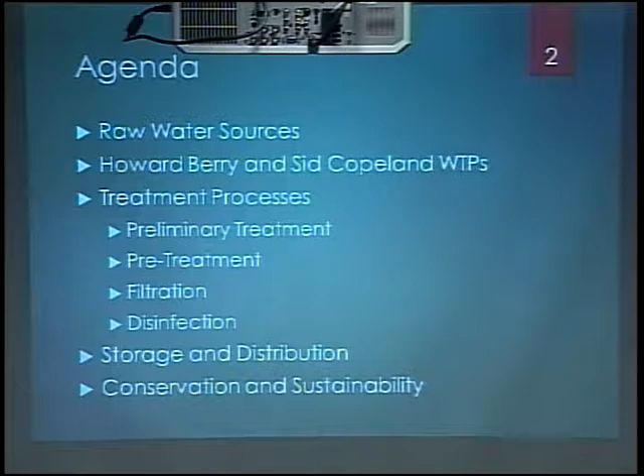So welcome, everybody. Again, my name is Corey Peterson, I'm with the city, I'm a water resource engineer. I've been with the city since 2015. So my first portion of the slide is just going to be going over water supply and where it all comes from. So here's kind of our agenda. We'll go through the treatment plant process and all of our different operations, and then we'll end it up with some conservation and sustainability tiebacks.

So as most of you know, Colorado is a semi-arid climate. What that means is we get less than 20 inches of rain per year. We do a little bit better than the state on average. The state gets about 14 inches of rain, Boulder County gets about 18, so we do a little bit better here in Louisville. But a lot of our water comes from snowpack. So this is the Continental Divide, it acts as our storage bucket and where most of our supply comes from.

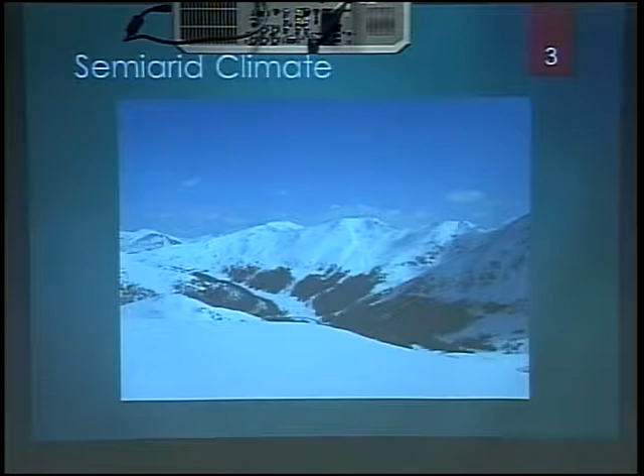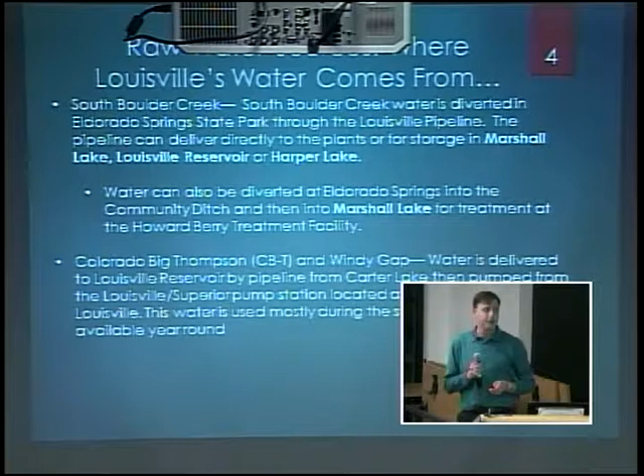So the city has 2 sources. The first source is South Boulder Creek, which is just straight south here. And then our other source is we get water from the Colorado Big Thompson, which is the Colorado River on the west slope.

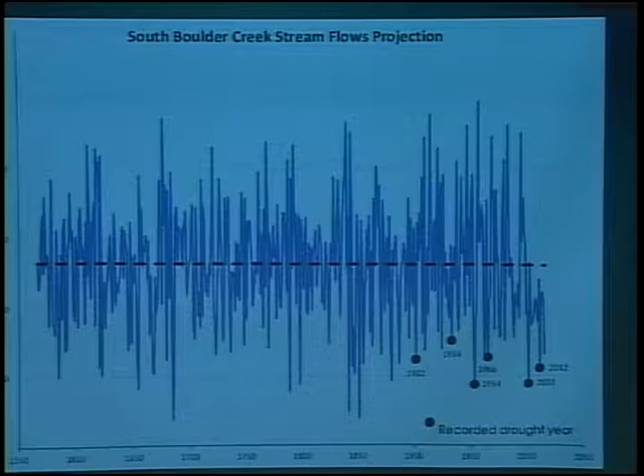Here is a stream flow projection recreated from tree rings. It goes all the way back to 1550, and you can see the variation of stream flows as it goes through. The other thing we noted, towards the bottom, are the recorded drought years we've had in the past.

You can see how significant it is, going from 100,000 acre feet down to 20,000 acre feet. An acre foot is something we use in the water community - it's an entire acre, 1 foot deep of water, a volume measurement. It's roughly 326,000 gallons, or enough supply for two average Louisville homes. That gives you an idea of what we're talking about as far as stream flow.

With this variation, storage is a very big component of our water supply, which is why we rely heavily on Marshall Lake and a couple local storage places - Louisville Reservoir and Harper. Louisville Reservoir is just outside of our North Water Treatment Plant, the Sid Copeland Treatment Plant, right over here on South Boulder Road. It holds about 210 acre feet of water. Harper holds about 715 acre feet, to give you a rough idea of what that looks like.

Since storage is such a key piece, I'll flip back here. This is the snowpack data from the NRCS for the entire South Platte Basin, which is what we're in. This dark purplish color is actually this year, 2018, so we're tracking right along where we are. We have this little dip with the last bit of warm weather, putting us at about 90% of average. This is something we look at regularly to determine where we are with water supply and where we're going in the future.

Just an interesting note - if everyone remembers last year's late snowstorm, we were actually tracking below average and were contemplating what we might have to do as far as restrictions, with various levels like voluntary restrictions. But we had those late snowstorms in May and June, which kicked us back into a very good year, and we were able to avoid any restrictions. Just a side note.

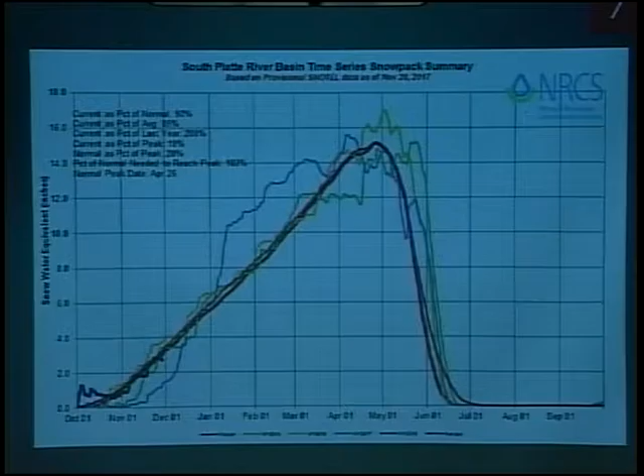The other place we get water from is the Colorado Big Thompson. This project was started in 1938, and it took until 1957 for most of it to get constructed. The Big Thompson project was done by Northern Water Conservancy District in conjunction with the Bureau of Reclamation - it was a federal project designed to take West Slope water and bring it over to the east.

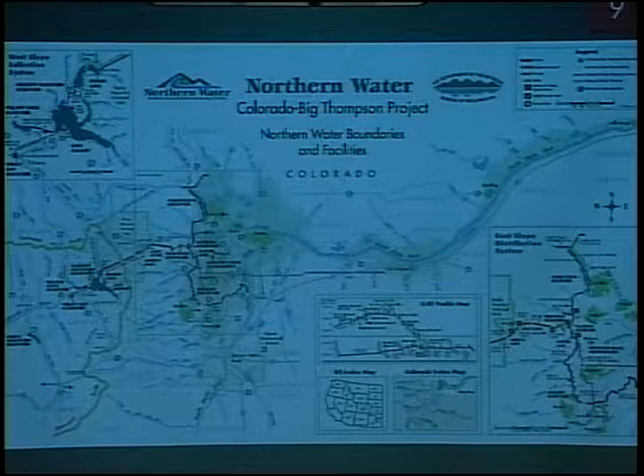Lake Granby was the next piece, started in the 1940s when construction began. There's a smaller Shadow Mountain Reservoir that gets pumped from Lake Granby into Shadow Mountain, which then drains into Grand Lake - the largest natural body in the state of Colorado, which is a cool fact. From outside of Grand Lake, it goes into the Adams Tunnel.

The Adams Tunnel was built in 1944, when they were able to hole through. What that means is they constructed from both west and east at the same time, and when they went through, the tunnel was off by only a sixteenth of an inch.

And this was in 1944. So it's very, very impressive that they were able to pull that off. The tunnel itself is a little over 9 feet tall, and it's 13 miles long.

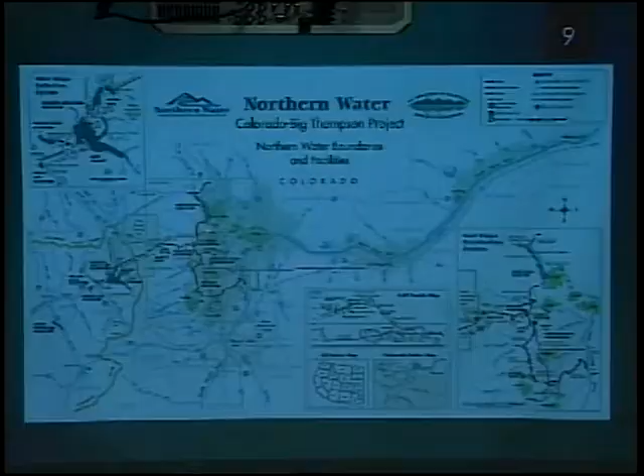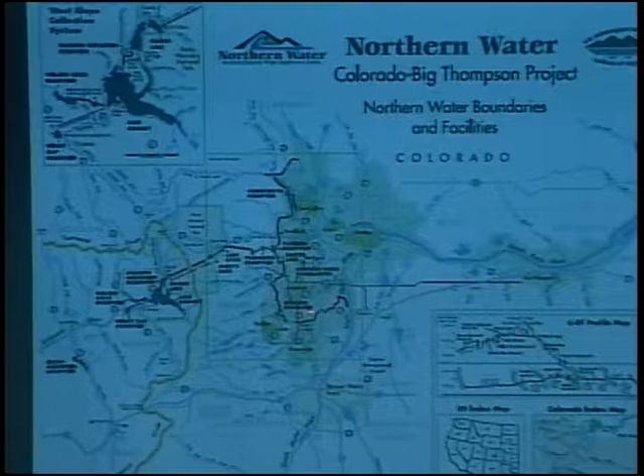Once it comes out the other side, it goes through a couple smaller lakes that they can use to generate power and offset their operating costs. And they can go into 3 storage reservoirs. It can go into Horsetooth, it can go into Carter, or it can come down here into Boulder Reservoir.

Louisville's water ends up in Carter Lake. That's where our water gets stored. And from there, it goes into what we're part of, which is the South Water Supply Pipeline. That's this little red line that comes right down here, and that's shared amongst most of our neighbors. So Lafayette, Erie, Superior, Broomfield, all of these surrounding communities use the same pipeline to get water from the CBT system out of Carter Lake to us.

We have about 2,000 units in CBT, and a unit is basically a half to 0.7 acre feet of water. So we get about 1,000 acre feet of water from the CBT system, and that makes up about 20%.

The exciting thing that we're in the process of now is a subset of the CBT system, which is Windy Gap, which is right here. The Windy Gap Reservoir started way back when. 1967 is when it was first started as a project. There were lots of lawsuits with this one on the West Slope, so it took all the way till 1985 before they actually constructed the reservoir. So it took about 15 years to get them all the way through and built.

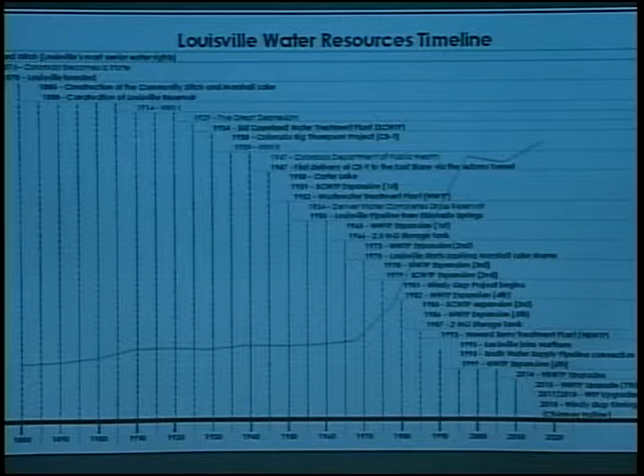Here's again when the CBT project started in 1938. The Department of Health was formed several years after that. So again, we're providing a source before a lot of these regulations and treatment processes were even in place.

Carter Lake was done in 1950. We started upgrading the North Plant in 1951, added more filtration to it, made it a little bigger. Our wastewater plant was also built in 1952. Terrell will go over some of this stuff in more detail, but that was kind of the driver for it.

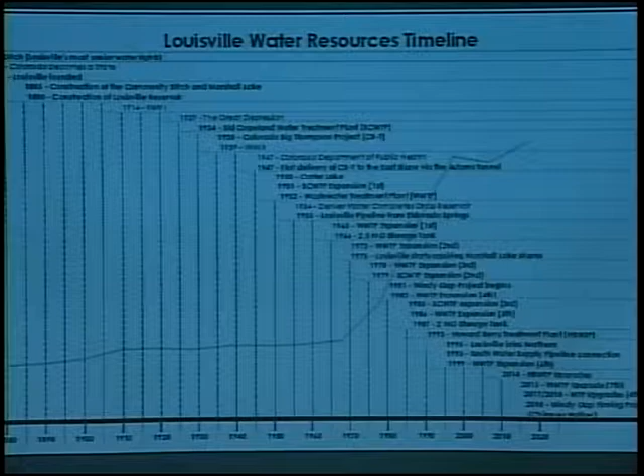We had our first expansion of the wastewater plant in 1965. Our first wastewater plant was just a settling pond with some aeration lagoons, and then we went to an extended activated sludge where we were actually actively pushing air into the system, which is all part of the treatment process.

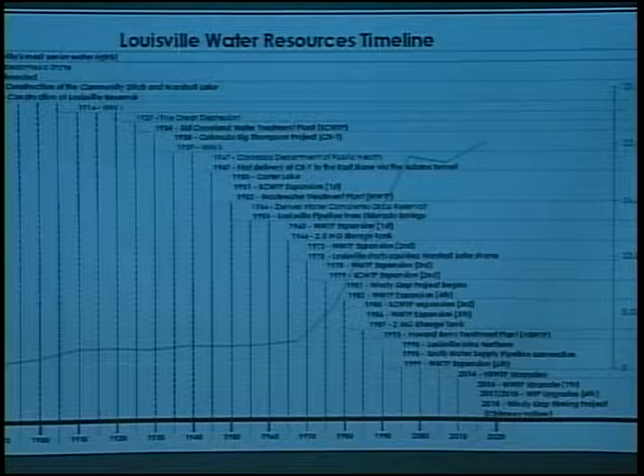We added a 2.5 million gallon storage tank for system pressure in 1966. That's out by our Howard Berry plant, on the south part of town, and that allows the pressure within the city to stay at the level that it can get to all your homes.

We expanded the wastewater plant a second time in 1973. We went to a larger lagoon system, went to 4 lagoons. We did that again in '78 where we went to a 6 lagoon system, and that was just more capacity to allow for this trend of more people coming into town.

We had another expansion of our water plant as well, and that was a new sedimentation basin as well as an automatic backwash, which was kind of state-of-the-art back then. Here's the Windy Gap project, which I mentioned before.

Probably the biggest one is right here in 1993 - we built a second treatment plant. This is our Howard Berry treatment plant, actually out on South Marshall Road, and it is a 5 MGD facility. That kind of really kept up with us as far as population control and those type of things, and being able to provide everything.

Let's see here, I'm trying to think. The more recent activity: in 2014 we've done some upgrades at our Howard Berry plant. We put in solid drying beds. Basically what that does is it allows us to handle the treatment, the various chemicals, and the process as we go through.

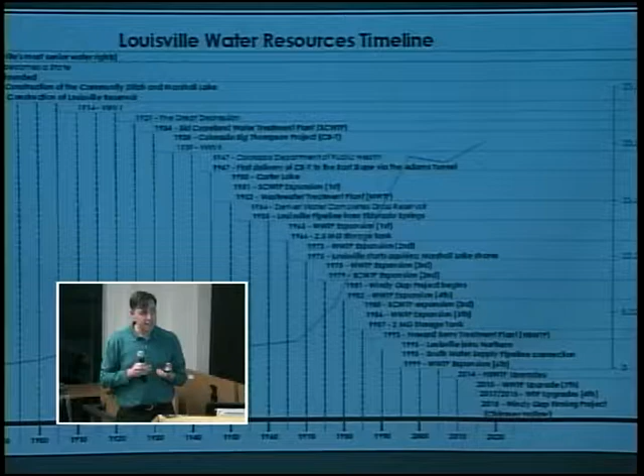And then again, here's the Windy Gap project that we have going forward for next year. So that's kind of it as far as supply. I'll go ahead and drop it off to Terrell here, and he'll go through the plants.

All right, thanks Corey. I'm Terrell Phillips, I'm the superintendent for the water and wastewater plant. So I'm going to talk about the process, taking it from the raw sources that Corey just explained and through the water to the discharge of Coal Creek.

So we'll start with our two plants. We have the Howard Berry, which was our newer plant, and the Sid Copeland plant, which was named after the superintendent that was with the city over 25 years - he was my predecessor. The Sid Copeland has an 8 million gallon per day capability, and the Howard Berry is about 5 million.

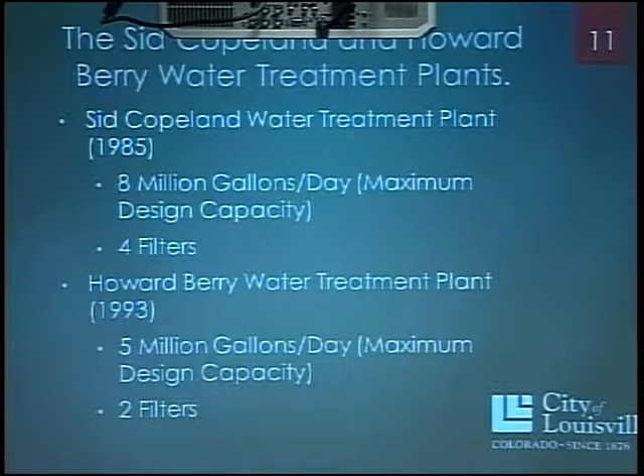So currently, we don't always run the Howard Berry all year round. We use it kind of as a peaking plant, or we kind of juggle between them as major projects or maintenance comes up, typically in the off season when the water demand's a lot lower.

So we start with preliminary treatment. We have the water sitting in the reservoir, and we want to make sure that we don't get a lot of algae growth in there, because when we have a lot of algae, that's when the water tastes funny, smells funny, and we get a lot of phone calls from you guys going, what's going on? So we try to mitigate that as much as we can.

So we have a SolarBee, which takes the water and it just keeps circulating, and that helps keep the algae from growing and blooming. We also apply a chemical chlorine dioxide, which oxidizes the taste and odor compounds. So these are some of the steps that we do to make the water taste good.

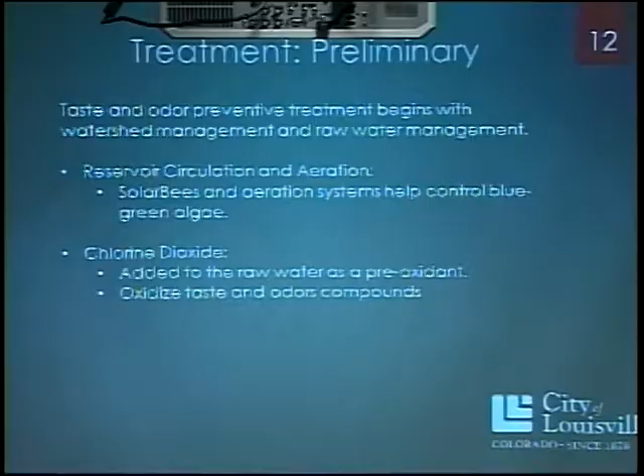This year we've done a lot more studies and tests to watch the algae and to treat it when the algae counts get higher. Hopefully you guys noticed that this year the water is better than last year - I don't think we did as well of a job last year. Hopefully you guys see that.

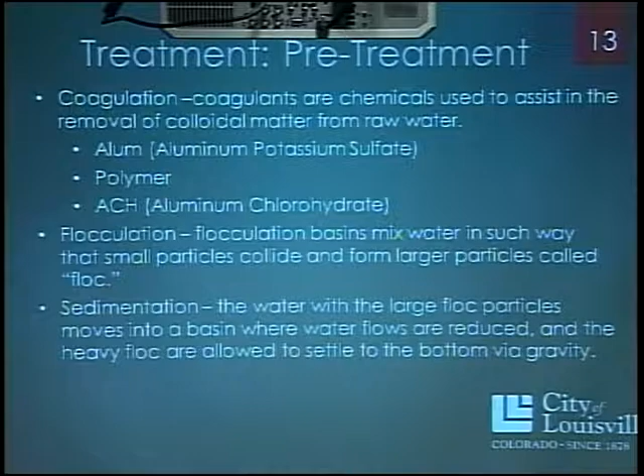So pre-treatment: the water comes from the reservoir, comes in the front, and we have basically 3 or 4 steps - coagulation, flocculation, and sedimentation. In the beginning with coagulation, we have our flash mixers. The water's coming in and we're hitting it with chemicals - alum, polymer, and ACH - right from the front. We have this mixture going on quickly because we want the chemical to coat the particles so they start getting a little bigger, making them want to stick together a little bit.

So the building that you see up there is the pre-treatment building. We have all these chemicals in that building, and at the very top of this picture is where the flash mixer chamber is. We have 2 motors and these mixers that are just mixing these chemicals in the water.

From there, we go to flocculation. We're still mixing, but a little bit slower, because now we've got the particles we formed in coagulation, but we want them to be bigger. We have to slow down the mixing, because if we keep mixing as fast as in the first step, we'll break them apart - we'll shear them. So we do a little slower mixing, and that lets the particles start getting bigger, coming together with the chemicals we put in there.

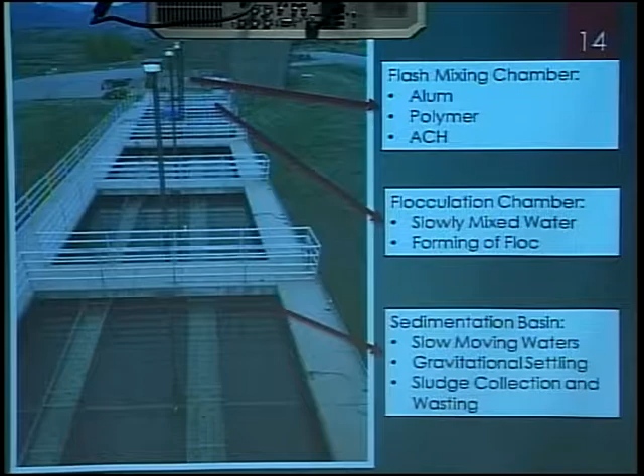That's kind of going on in the middle - can't really see it, but the middle part is where the flocculation's happening. We have 2 mixers at the Howard Berry plant.

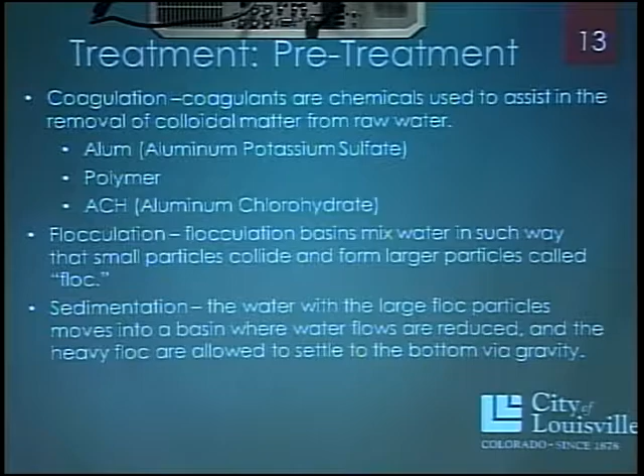Then for the sedimentation, these particles are sticking together, getting bigger, getting heavier and denser than water. So they start settling out to the bottom of the process, and we just have the cleaner water on top. So we have sedimentation, and then that moves us on to filtration.

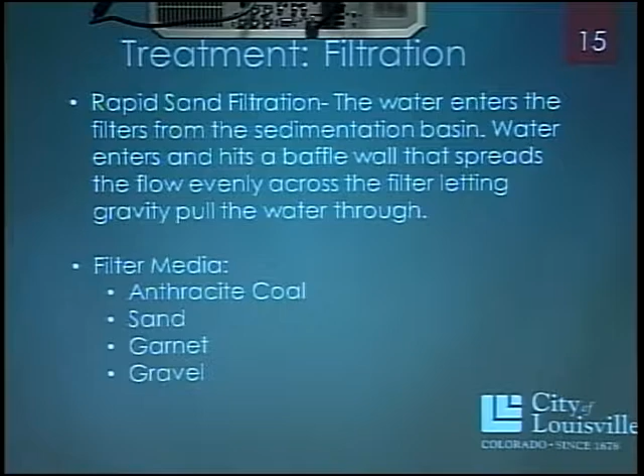As Corey mentioned earlier, we have sand filters - rapid sand filters, which is technology they've been using for hundreds of years. It's pretty old, but it works, and we still use it today. We actually have a project this year to replace some of this media, which will happen January, February of next year. The sand filter has a layer of coal, sand, garnet, and gravel.

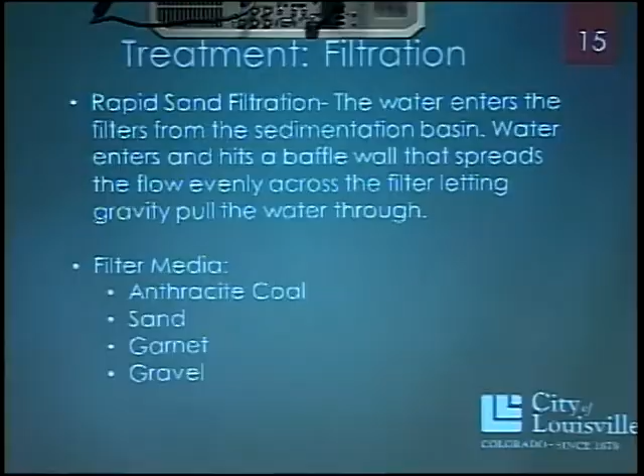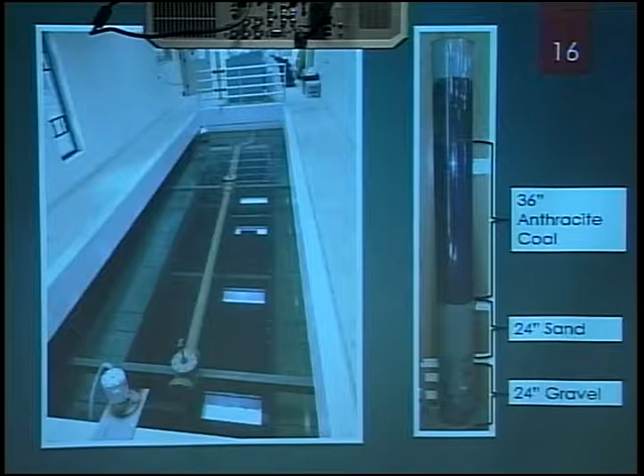Just to let you see what that looks like, I've got a side profile so you can see the different layers. This is the actual filter at the Howard Berry plant. The water goes through this filter, and that sand filter pulls out all those particles - the big particles that settled out, or that didn't settle out and made it to the filter, actually get pulled out.

Then the last thing we do is disinfect it. We want to make sure any microorganisms that made it this far are inactivated, so we apply chlorine, which is also required by the state. Chlorine ranges - we can't get any lower than 0.2 milligrams per liter. If we do, we have to call all you guys and let you know, and we also have to call the state, because it's a big deal. It can't get any higher than 4 milligrams per liter. Currently our target is about 1.7.

We have all our parameters on the web right now, so if you ever want to see what our manganese or copper or anything like that is - all the things we test for - it's all on our website, and it's up to date. You can see our pH levels. It's a pretty good reference point.

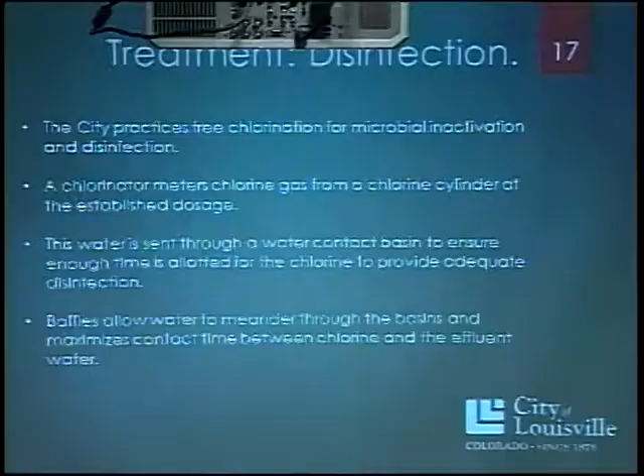When we chlorinate, we have a clear well where we have to have a certain amount of time that the state requires with the chlorine, to make sure we inactivate any microorganisms that have made it that far. Shouldn't be any, but this is kind of a step just to make sure. So it sits in the clear well for the required amount of time, and then it goes into storage tanks.

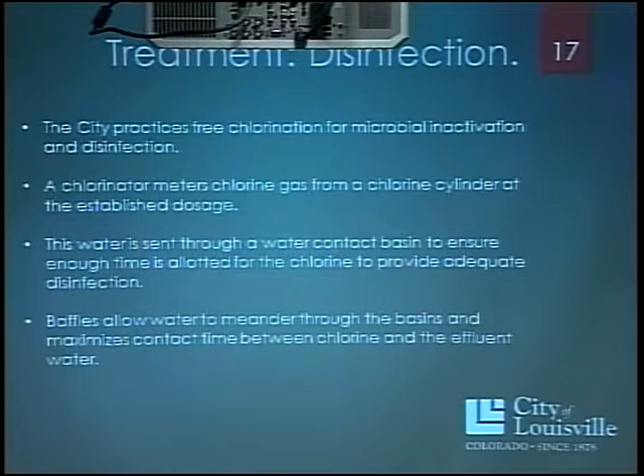We have 3 storage tanks in our system, spread out through the city strategically. We don't want all our water storage to be in one spot, so we have 3 tanks. We have a low zone tank that can hold 3 million gallons.

We have a mid zone that can hold 3.5 million gallons, and then we have a high zone, which can hold 2 million gallons, for a total of about 8.5 million gallons in storage.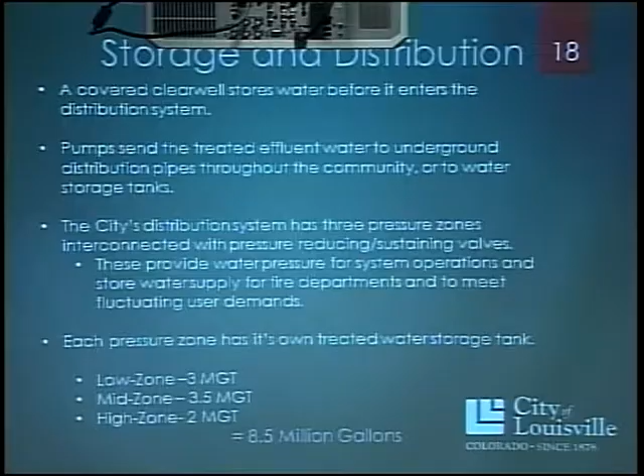In the summertime, that'll last us about a day. In the wintertime, closer to a week. Just to show you the difference that watering the lawn makes in the summer, because we're still showering, taking baths, and doing laundry in the winter, but our water demand drops by that much from summer to winter.

And that's why we have to turn on the other plant, because the 8 million gallons that the Sid Copeland plant can do doesn't provide enough water for the city. So anyways, that's a picture of 2 of our tanks. They're a lot taller than they look in this picture if you ever get to see them.

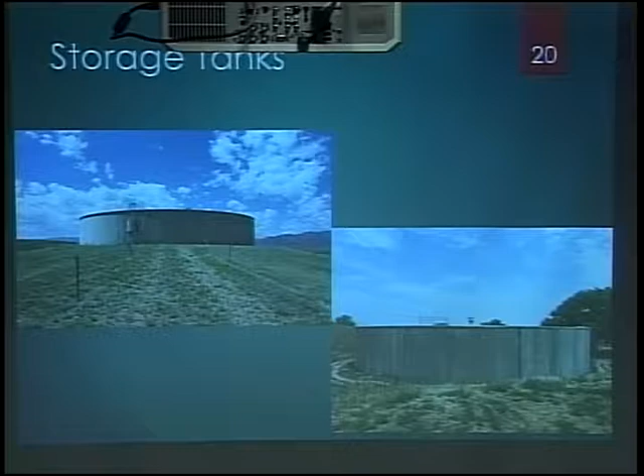So once it goes to the tanks, it goes to distribution, goes to your house, and then you guys use it and you send it back to the city through the wastewater plant that just got upgraded.

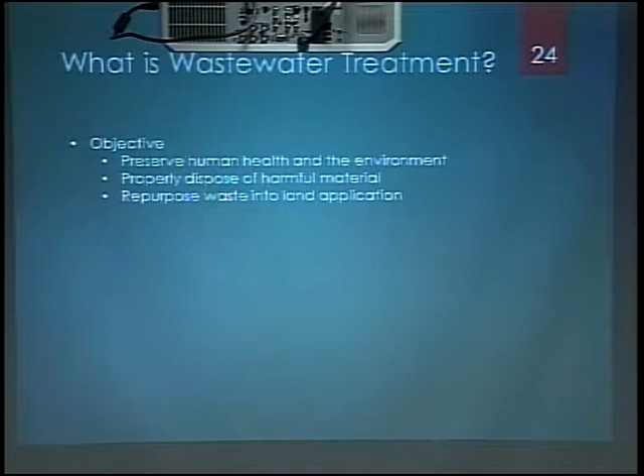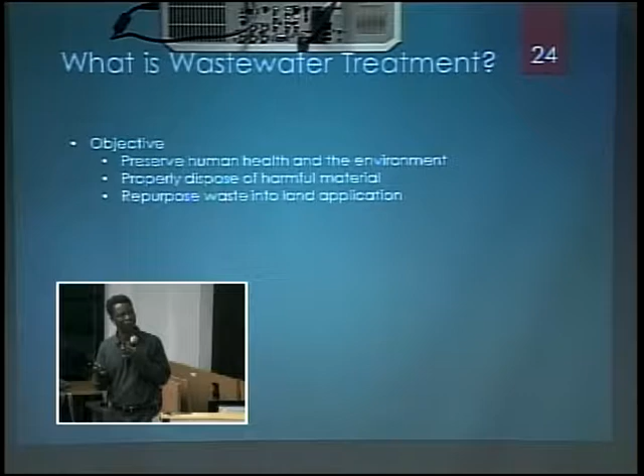So what is the objective of wastewater? Well, we want to take all the bad things that can hurt the environment and hurt us and make us sick. We want to dispose of it properly, make sure everyone's healthy, and also repurpose it when we can.

We can't really control what comes into the wastewater, but we can control and limit what comes out of it. Some of the things that come to the wastewater plant shouldn't come. Dental floss isn't something you want to flush down the toilet. Feminine products, other products that people use, those cause problems to pumps. They don't really aid the process, so those things need to go in the trash. It keeps prices down, keeps pumps healthy, and makes the process a lot better.

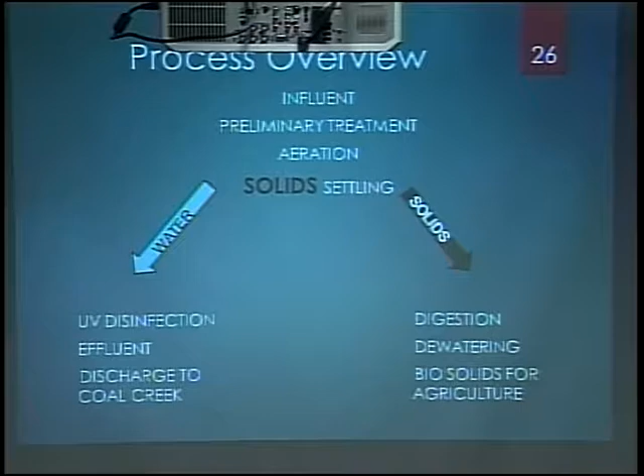So water that comes in, we call Influent, and basically it's either going to come out as water or it's going to come out as solids. We'll talk about both of those tracks.

Here's a quick process overview that we'll dive into a little deeper. Influent comes into the plant, goes through a flow meter because we're required by the state to see how much water is coming in and how much water is going out, so we pay attention to those things.

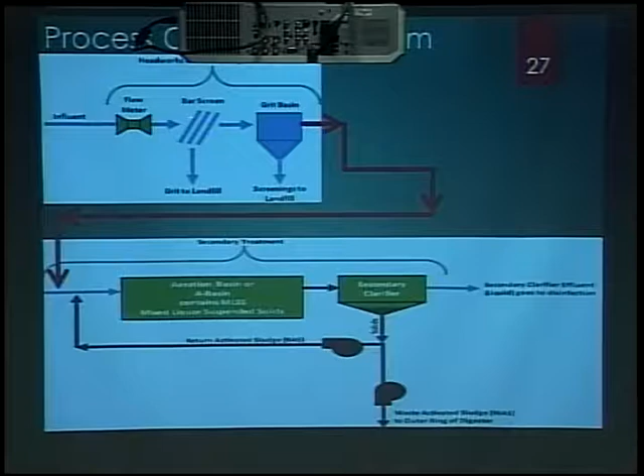It goes through a bar screen and grit basin. The bar screen pulls out the bigger inorganics and things that don't really help our process. The grit basin pulls out some of that sedimentation and sand that's in the process. So we try to clean it up a lot before we start treating it.

It goes to the aeration basin, secondary clarifier, and then we'll talk about the solids track, which is one way out of the plant, and we'll talk about the water plant. So everything goes through this process, but at the clarifier it's got 2 paths to get out. We'll talk about that in more detail.

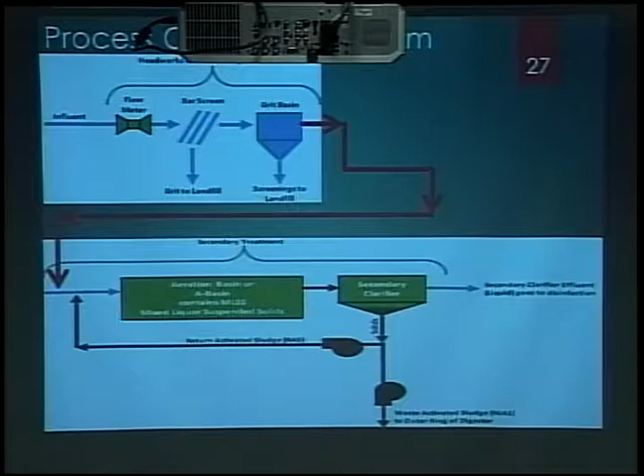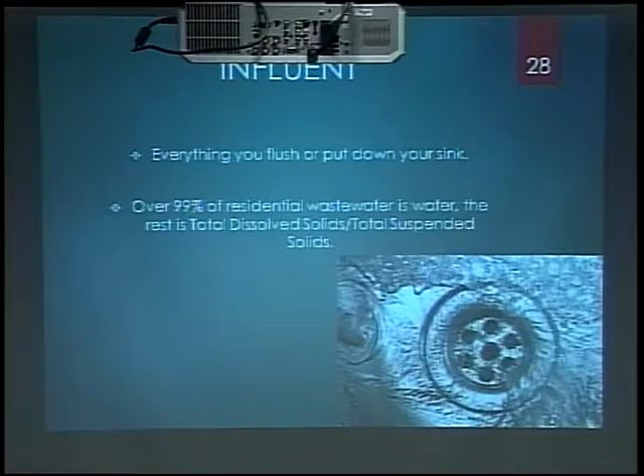So what is Influent? It's everything you flush down the toilet or put in your sink, everything that goes down the drain is what we call Influent. Most of residential wastewater, 99% of it is just water. The other 1% is total dissolved solids and total suspended solids. So most of it's just water.

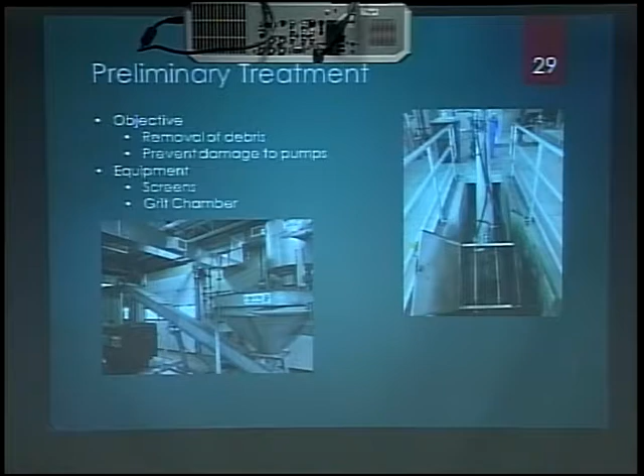So we start off with the preliminary treatment, which I tried to show in the overview, where we remove some of the debris, some of the larger inorganic products. This helps protect the pumps and makes our process a little more stable. So we try to pull what we can out, and this building's called the Headworks, where all this equipment's stored.

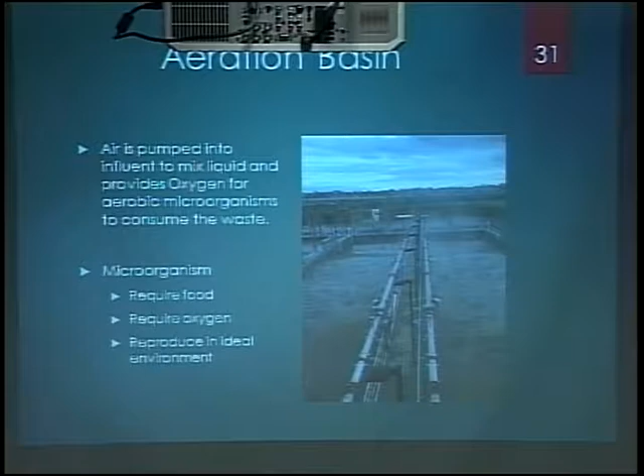From the Headworks, it goes to the aeration basin, and we mix this liquid with air to feed our microorganisms. Microorganisms are a lot like us. They require food, they require oxygen, and in the ideal environment, they reproduce.

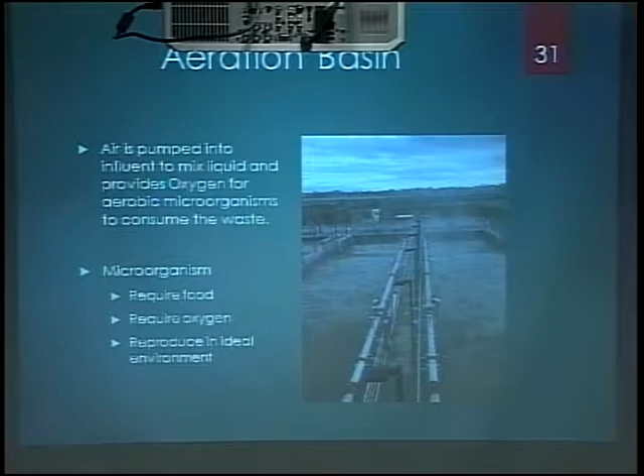So this is important because our waste is their food. We try to make this environment perfect for them so they can reproduce, so they can eat, and start breaking down some of that waste that we have.

From there, it goes to the clarifier. As Corey mentioned, we have 3 clarifiers now. They're brand new with the new upgrades.

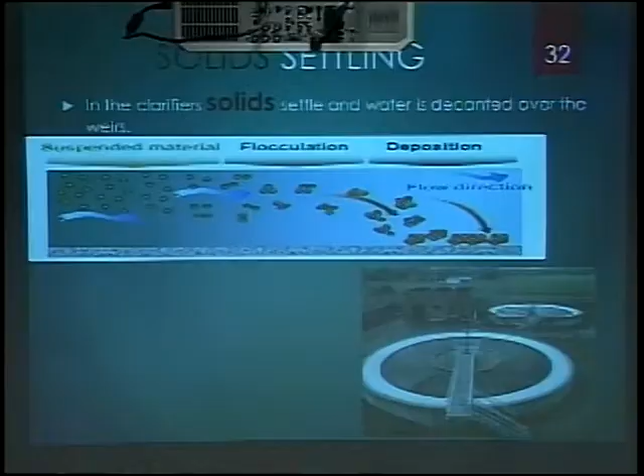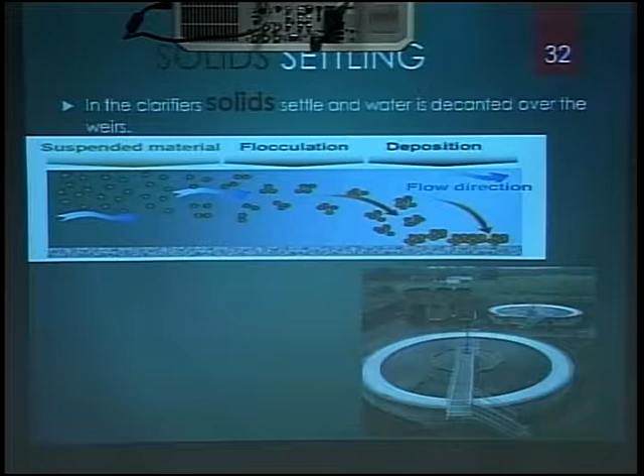Just like the water plant, the solids spread out and the heavier ones start settling out, and you're left with the cleaner water on top of the process. This is good because on the edge of these clarifiers, we call it the weirs, and that clean water will just flow over the weirs and head to that building right behind, which is called the UV building, while the solids will go down to the bottom of the clarifier.

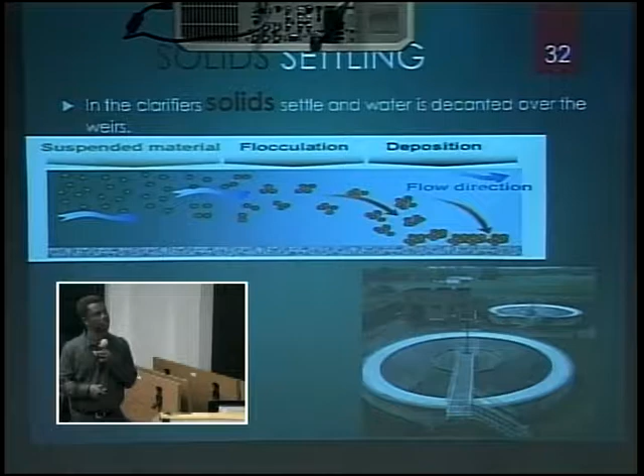So in the UV building, we expose the water to ultraviolet light to inactivate the microorganisms, and then we discharge to Coal Creek. The water we're putting in Coal Creek actually improves the water quality, because we've done the filtration and UV, so we improve Coal Creek with the water we discharge.

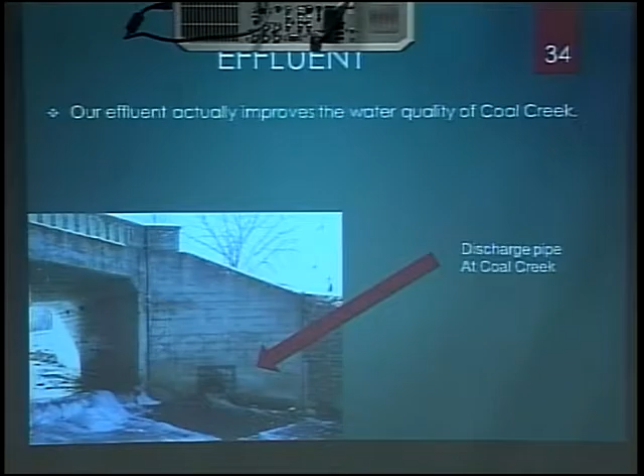I would say in the early 1900s, the water we're discharging from the wastewater plant is cleaner than what people probably drank in the 1920s, 1910s. So we've moved up, and the standards keep getting more and more strict.

In the clarifier, I talked about solids settling down to the bottom. Well, when they go to the bottom, we pump them into the digester. We keep giving the microorganisms air, but we stop giving them food. So we kind of put them on a diet and shrink them up a little bit.

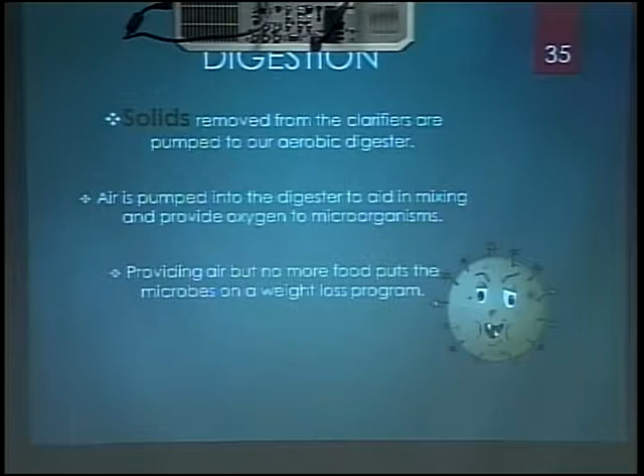The reason we do this is we pay money to get the solids removed from the plant. We don't want the bugs to be healthy and heavy. We want them to be as skinny and light as possible to save us money. So we put them on a diet, let them get a little smaller, and then the digester's concentration is about 1.5% to 2% solids.

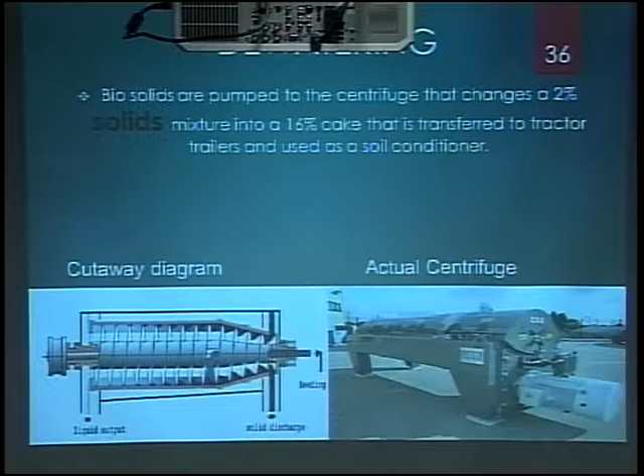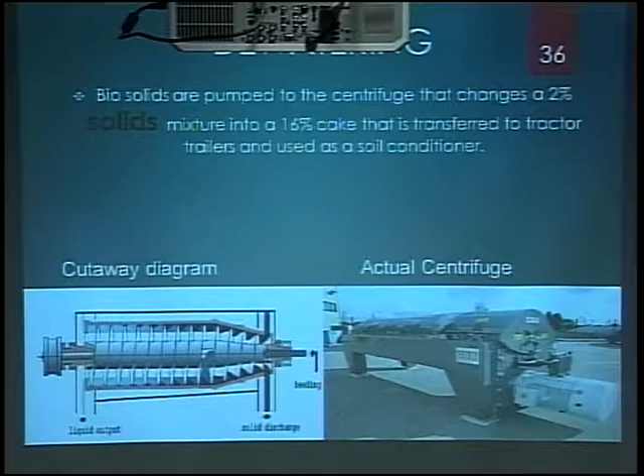Once we have them settle out in the digester, we send them through the centrifuge, which spins really fast. It gets the water out of the process, and we go from about 2% solids to 16% solids. Then the cake gets kind of corkscrewed through the centrifuge, and the water we send back through the process again. All that solid sludge that we pull out, we load up trucks 2 to 3 times a week.

We have a contract with a company named Veris, and they haul all the solids away from us. Actually, I'm preparing a council communication right now for the 19th to renew this contract, because every year we send out bids and compare prices to make sure we're getting the best prices for the citizens.

This solid is also land applied in Weld County. So, this is a sustainability speech, so I wanted to tie in some of the reuse water.

Reuse water is water that has been converted through the wastewater. We try to use some of that water because it's cheaper than potable water. So where do we use reuse water in the city of Louisville?

We use it at the golf course for irrigation. We use it to fill up the ponds at the ball field, and we use it for the community park and the dog park. Each day we have about 1.6 million gallons of water discharged from the wastewater plant, which is about 50 million gallons per month.

On average, about 600 million gallons per year, and we use about 4.2 million gallons a year for reuse. So we try to lower costs wherever we can and use this water twice, or reuse it. That's pretty much the process for water and wastewater.

Any questions for me before I hand it over to Matt from PACE? Yes, sir? Okay, I appreciate that.

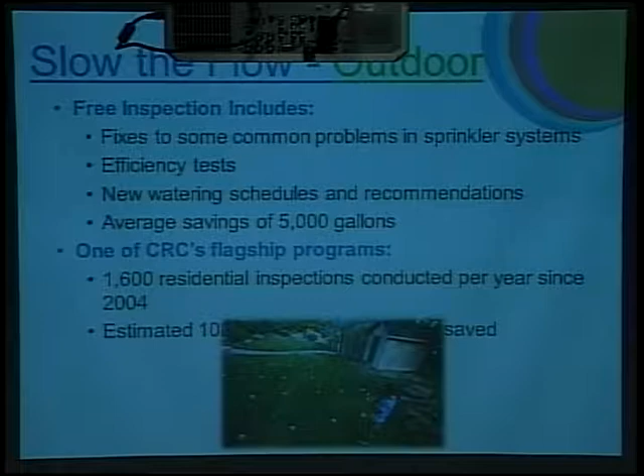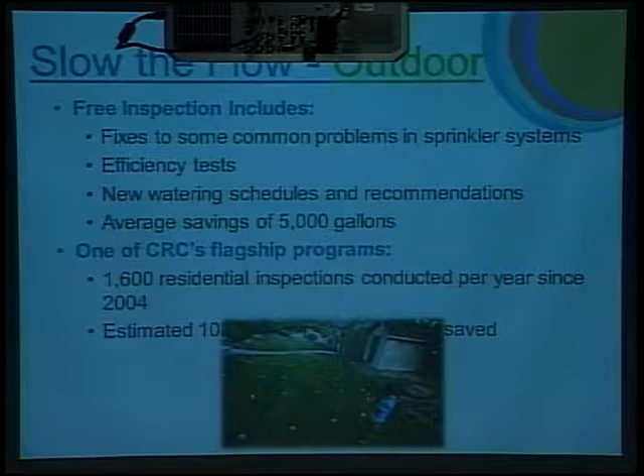We've been doing this since 2004. We average about 1,600 sprinkler inspections throughout Boulder County and the whole Front Range every year, and this past year we did nearly 2,000 audits. Since 2004, we've combined to save about 108 million gallons of water just through Slow the Flow outdoor.

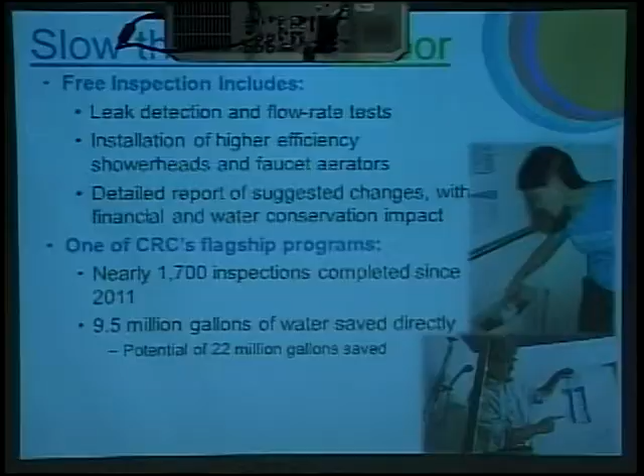On the indoor side, we look at the flow rates of your faucets and shower heads, and check for leaks in your toilets to prevent water waste. We also offer free upgrades to those faucet aerators that Matt had laid out, and free high-efficiency shower heads, usually at 1.5 gallons per minute. At the end of the inspection, we give the homeowner a detailed report of what they can do to save even more water - that could be changing their toilet to a higher efficiency model or swapping out their washing machine - along with a cost-benefit analysis.

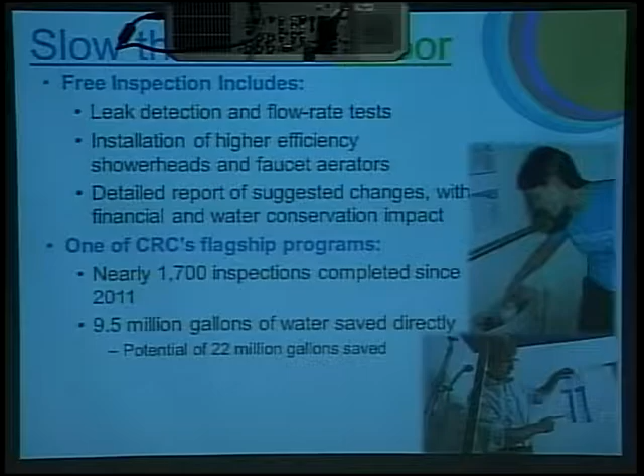We've done almost 1,700 inspections since 2011. It's a relatively new program, and we've saved 9.5 million gallons of water directly through those fixture swaps. If everyone actually follows all of our recommendations for other water conservation changes in their home, we have the potential of saving an additional 22 million gallons of water.

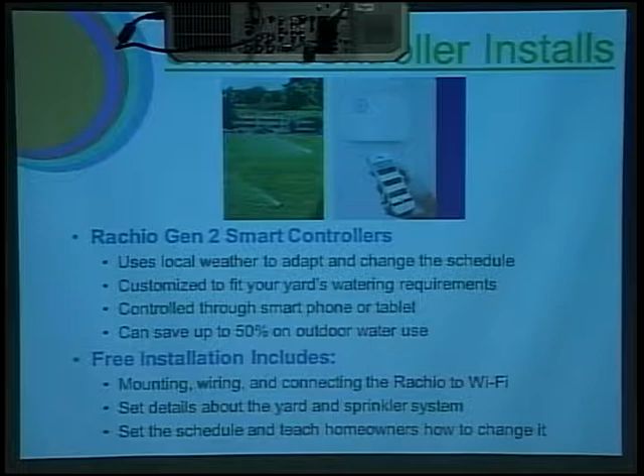It connects to local weather stations via Wi-Fi and automatically programs what your specific yard or sprinkler system should be watering, based on things like how much sun your yard gets, how much slope you have, and the precipitation rate of your sprinkler system.

Because of a partnership with the City of Louisville, we're able to offer these for free to residents. However, it's very limited quantity, and you have to have gotten a free sprinkler inspection first, because we use the data from that inspection to program the Rachio for your system. We'll mount it, do all the wiring, set the schedule, and show you how to set it yourself, so if there's a power outage or the schedule is lost, you have the power to reset it.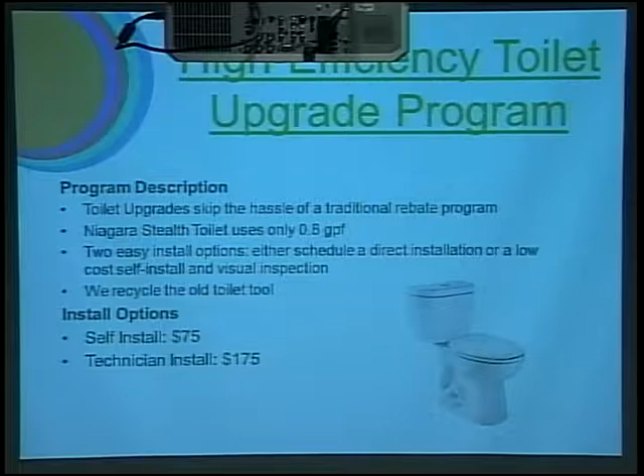So you have two options for getting one of these toilets: a self-install or a technician install. The self-install is a little cheaper, but with a technician install, we'll take away your old toilet, put the new one in, and recycle the old one. These are 0.8 gallon per flush toilets. Usually you'll have a 1.6 gallon per flush toilet in your home, unless you bought a brand new one, which is 1.28 gallons.

On our landscape program side, we have Garden in a Box, which is basically putting water conservation into action via landscape change. It's an easy and affordable way to use xeric, or low-water-using, plants to beautify your lawn — or take out some turf, take out your lawn, and beautify your entire yard while saving water.

These are small do-it-yourself gardens that come in 1 to 2 flats, 15 to 30 starter plants, accompanied by a very detailed plant and care guide, as well as a plant-by-number map. It's really simple — I've installed 3 on my own property, and it's really tough to mess up. It's a lot of fun.

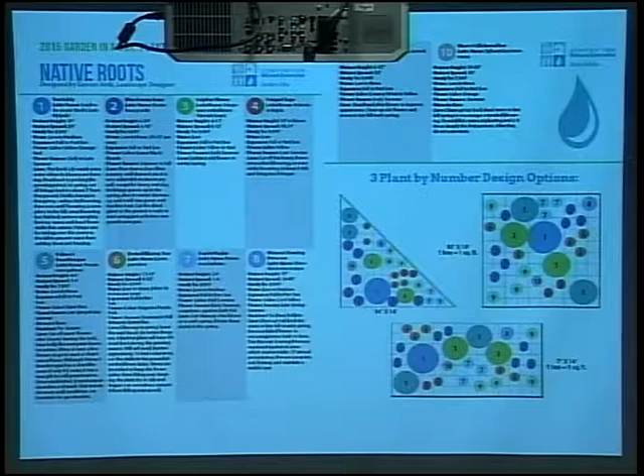Each garden is relatively small, but you can always buy multiple — they're 60 to 100 square feet. These are 2017 prices, so they could be a little different, but they range from about $75 to $150, without the discount.

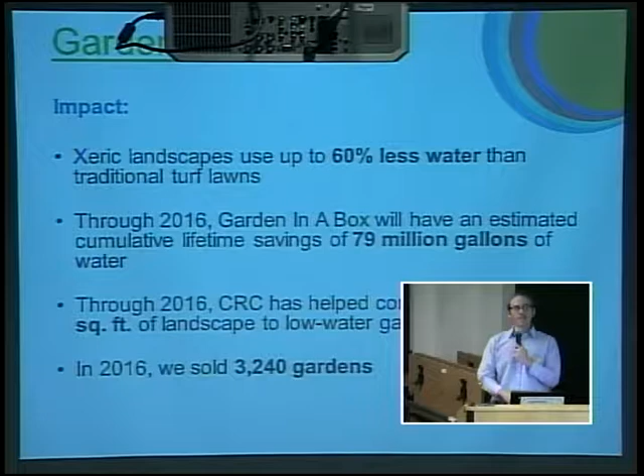The reason these are so successful, other than being beautiful, is that xeric or low water using landscapes use 60% less water than a traditional turf lawn. So if you're thinking about getting rid of your grass, this is a great substitute for turf. Through 2016, and I think through 2017, we've saved about 85 to 90 million gallons of water through the cumulative lifetime savings of the program. We've converted, or helped convert, about 1.2 to 1.3 million square feet of landscape to these low water landscapes, and in 2017 we sold 4,000 gardens. So each year it's getting bigger and bigger.

The very last program we have is a WaterWise Landscape Seminar series, essentially a seminar about WaterWise landscaping principles. It could be about xeriscape, how to remove your turf, or proper plant selection, and these are all free to the public and taught by professionals.

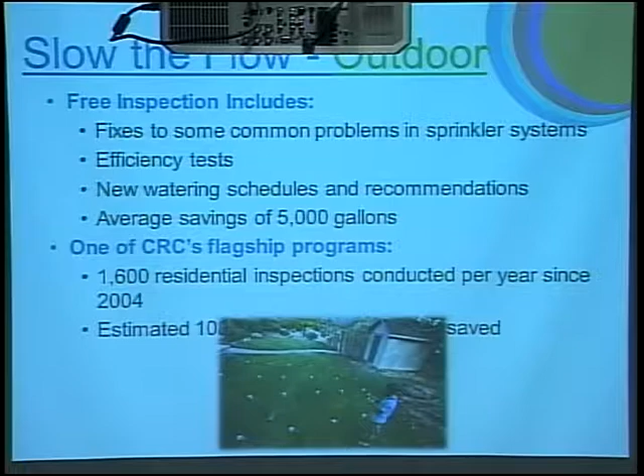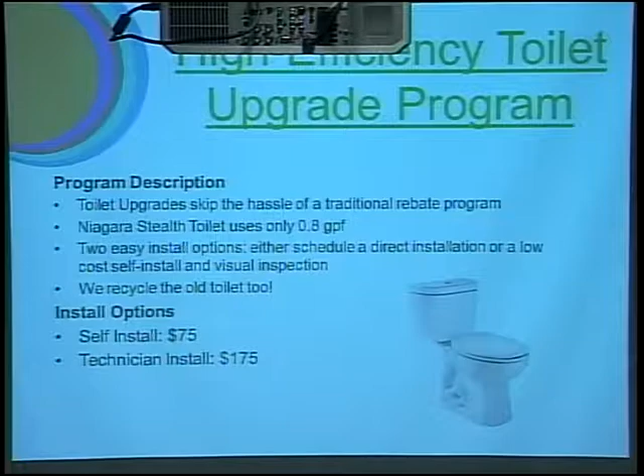Through Slow the Flow outdoor, we've saved since 2004, 108 million gallons, plus another 9.5, so roughly 118 million. And I had a slide about how much the toilet program saved, I want to say 30 million. So 148. And gardens, what did we say? Lifetime of another like 80 million. Oh boy, I lost count. So over 200 million gallons in just these 4 programs.

And we actually run a few other programs, just not on offer to the city of Louisville right now.

From the water treatment side, have you seen the numbers of gallons used by the city reflect these changes? Yeah, I'd say in the summers at least 60% is lawns. When you come into the house, I don't know the exact breakdowns either, it'd be a good question for our ops group, which I can get that information for you. But showers being probably the biggest indoor use, and toilets. I think he's dead on.

As far as overall water usage, the city's been relatively flat for the last couple of years. Even with the population increases we've seen coming in, our usage has stayed the same. So you're kind of seeing that conservation is bringing the demand down overall.